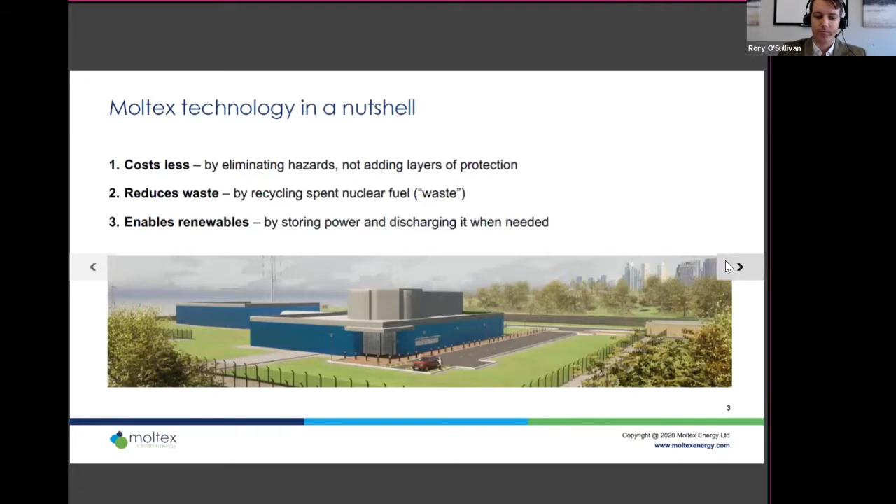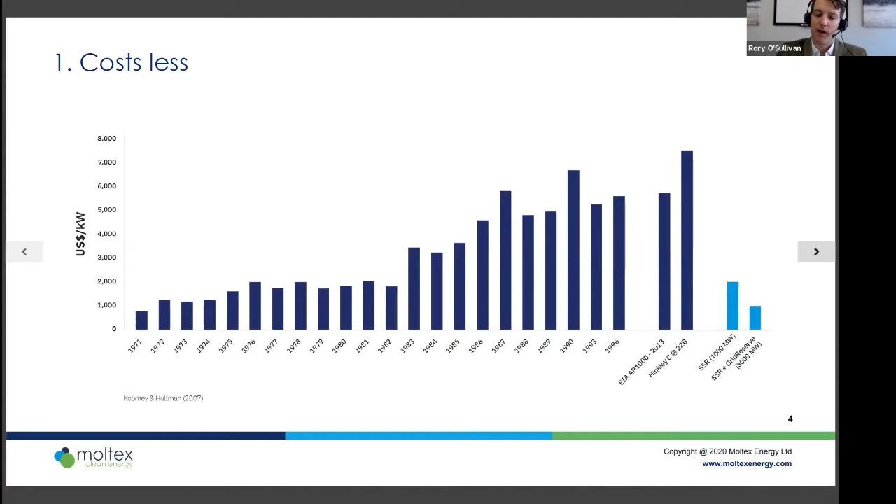That produces clean electricity. They currently are stored in reactor sites all around the country. And at the moment, there's a plan to put them in a deep geological repository somewhere in Ontario in the future. That is a sound plan, it's well established, and it's absolutely viable, it's costed. It's the Nuclear Waste Management Organization dealing with that.

But what we're proposing is a little different. This is what our research is going to evaluate, whether this is possible and feasible economically. We're looking at taking that used fuel that's currently stored at the reactor sites and converting that into fuel for our reactor. We can then produce more clean electricity with our reactor from that waste.

Now, we'll still have some waste from our reactor, so we can't ever get rid of the problem, but the intention is to really reduce the amount of long-lived waste that needs to go into that storage facility, and reduce the complexity and radiotoxicity of it over the long term.

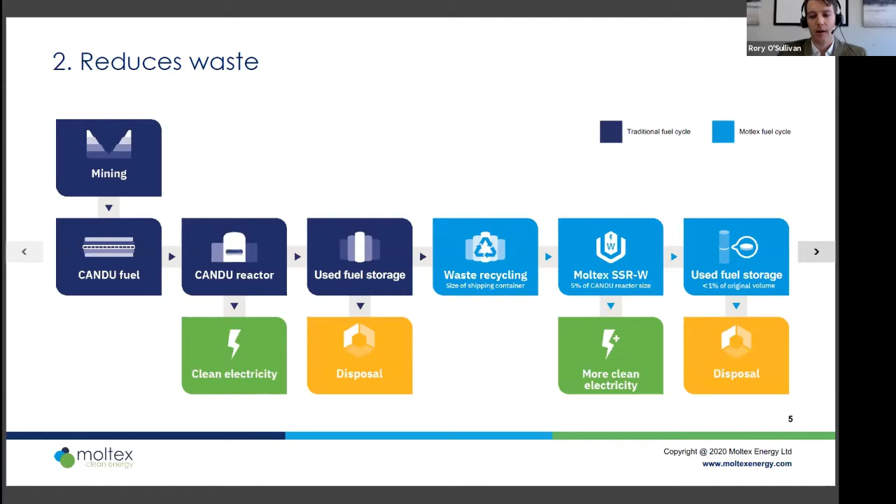Next slide, please. And then the third is our ability to complement renewables. So there's been a lot of progress with renewable energy in the last 10, 20 years. However, the planet has spent about $3 trillion on renewables, and actually we haven't changed our carbon emission percentage. We're still at around 36% non-emitting sources.

What you need for renewables to be successful is energy storage. Electric storage is very expensive. We're looking at combining small modular reactors and energy storage so that we can have more renewables on the grid.

Now, I want to add that we're not talking about the micro reactors for northern communities here. We're talking about big power plants that could run cities. So in New Brunswick, we're looking at a 300 megawatt reactor that could potentially go up to 600 megawatts for shorter periods, so you can really get more value out of the renewables when the sun isn't shining or the wind isn't blowing.

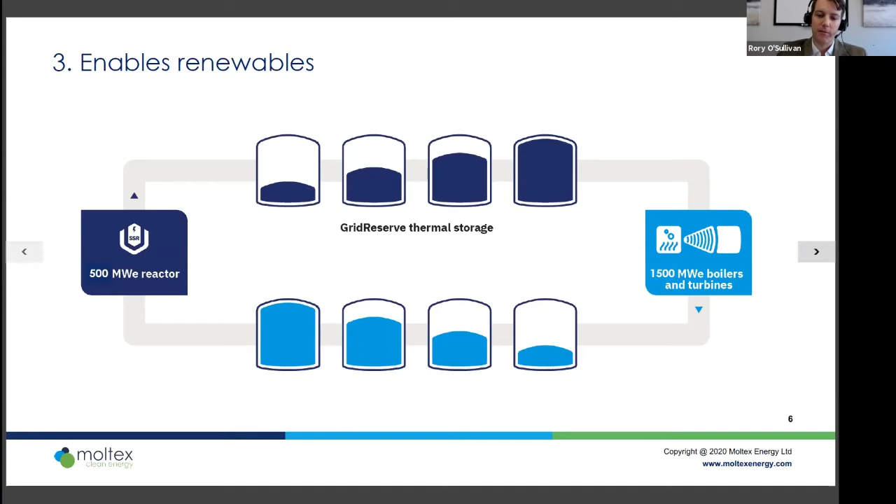So in terms of First Nations engagement, really we're quite committed to early Indigenous engagement in Canada. Some of the reasons for that are we know this technology is really very disruptive. Nuclear power particularly is quite controversial.

So you want to make sure we're really having those discussions as early as possible. But we know the end goal of almost all Canadians is to solve climate change and essentially make the environment in Canada better, and that's with clean energy. So the views are a bit disputed around nuclear. We think it's a clean energy solution. There are some issues with it which we're trying to deal with.

So we want to have these early discussions to be able to understand the issues of First Nations as early as possible. This isn't specifically formal engagement that is required as part of a project. We're way before formal engagement as part of a project. This is really asking the question: do First Nations communities want to actually engage at this early stage? What are the concerns? What does engagement look like?

Where we've got to in New Brunswick, our main partnership is with North Shore Mi'kmaq District Council here. That was a partnership established around May 2020 this year. It's to get meaningful, long-lasting relationships, understand what the communities want out of a relationship, partner with the local Indigenous businesses, and most importantly, create high-value jobs for Indigenous youth to work on training programs so they can actually maximize the benefits of this program in New Brunswick as we move forward.

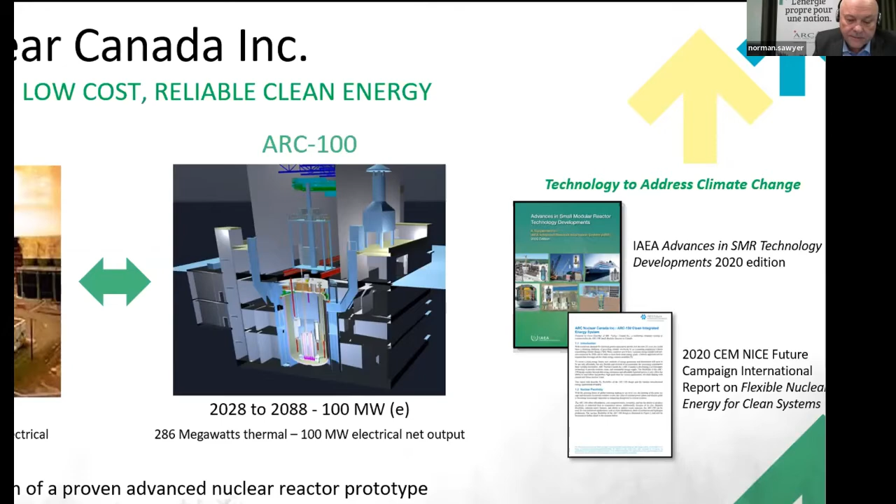There's no real permanent requirement for fueling equipment, because our reactor is fueled once every 20 years. You load the fuel and the reactor will run for 20 years. This really lowers the cost, which is essential for the nuclear industry. The reason for that is we bring to market inherent safety features, which provide natural control of power without human intervention.

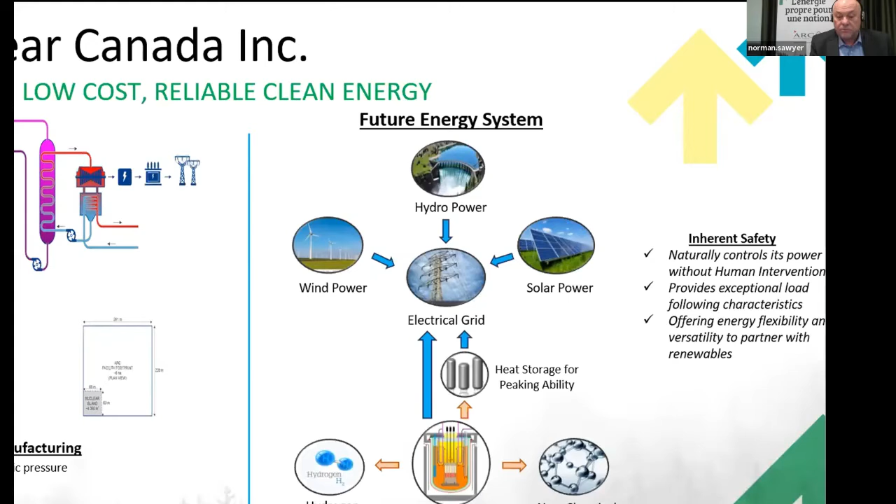Option one is a significant decrease in volume using the current approach. Option two is a direct recycle option, which we call reconstitution, where we can recharge our fuel and use it again for another 20 years. Option three, as we talked about earlier, is going after some of the used fuel that's already in place. Option four is a delayed approach where you can store this reusable energy and use it at a later time. So there's really flexibility we bring to the market for our reactor going forward, which is really critical. Next slide, please.

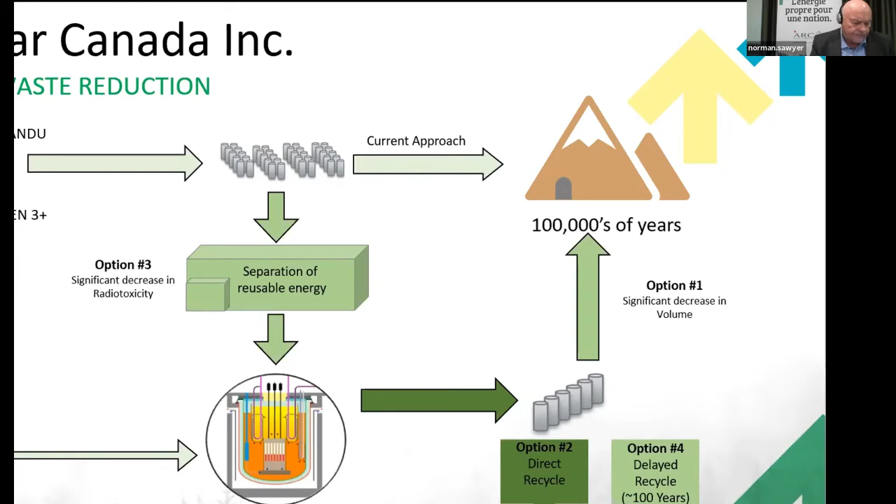As you can see here, when you do this reconstitution, with a 20-year fuel cycle, you get a significant reduction in waste volume and safe storage, plus a significant amount of reusable energy. As Rory was explaining, any used fuel in play here in Canada still contains energy that can be used. It's non-proliferation, and it's an environmentally responsible process because it's a dry process.

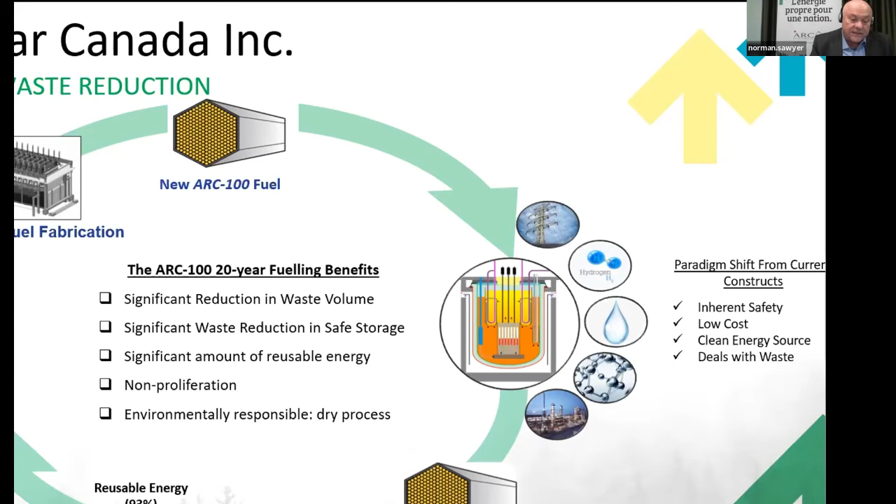So as you reconstitute your fuel, you don't have the waste issues. What that means is you're reusing about 93% of the energy again, which only gives you 7% waste. This diagram compares the different amounts of waste produced for about 90,000 homes for 1 year, roughly the size of Saint John and Fredericton, New Brunswick combined, just the houses, as compared to our technology.

Light water reactors, mostly used in the US, produce somewhere around 2 metric tons of waste, where heavy water reactors produce somewhere in the vicinity of over 16 tons. Our little ARC reactor produces less than the other 2 technologies without doing anything. However, if you reconstitute, you can see it's down to a couple hundred pounds, which really addresses one of the major issues, waste, but also addresses the cost factor and the safety factor. So our technology addresses all 3 main issues we deal with today.

Thank you very much.

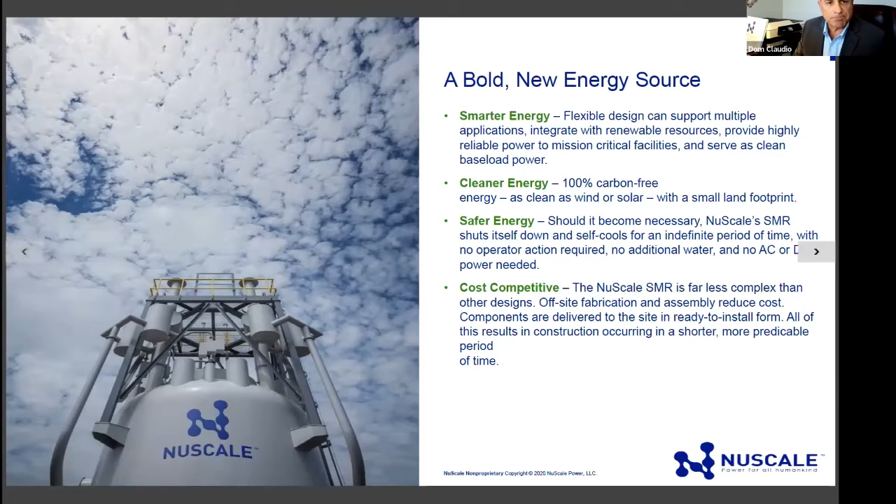So a little bit about the technology itself. At its core is the NuScale power module, that's the picture on the left. It stands about 25 meters in height and is about 5 meters in diameter. It's totally factory built. You see the containment vessel on the outside. Inside is a reactor pressure vessel, and the nuclear core is at the bottom. It's a simple design, taking advantage of natural circulation as the mode of transporting heat to the heat exchangers.

Once this vessel produces steam, and once the steam comes out of the module and goes to the balance of plant, the rest of the plant is very similar to what you would find in a coal-fired plant.

Again, this is factory installed, and each module can produce up to 77 megawatts of electricity with its own power conversion system. So incrementally, in our base case with the US NRC, we're utilizing up to 12 modules in a building for a total of more than 900 megawatts.

However, more recently, as a result of utilizing a power uprate on the module, and focusing more on baseload applications, we're able to extract more thermal energy out of the module. This has allowed for the development of power systems with as little as 6 or 4 modules, somewhere between 450 and 300 megawatts electric.

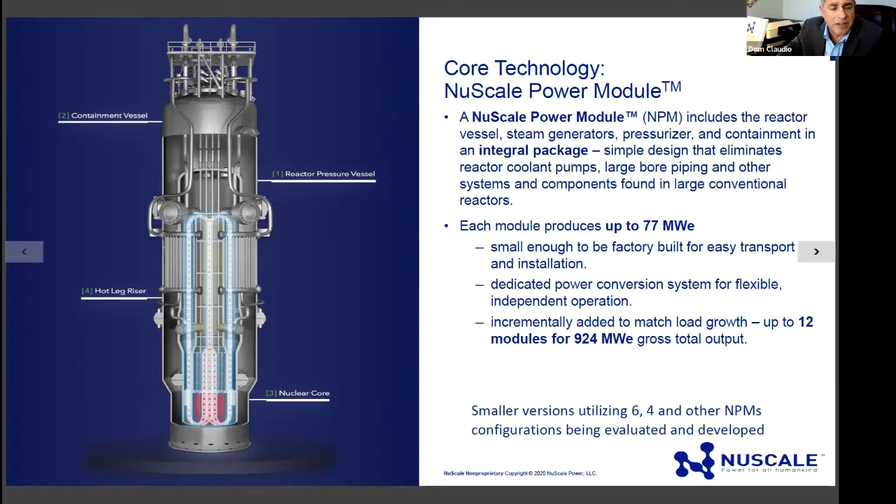So we talked about the module. It goes into the building. In this particular building, our flagship building, houses 12 modules. Smaller configurations are available.

That building sits in the middle of the field, as you see on the bottom right. The total footprint of this particular configuration is about 35 acres or 14 hectares. It can sit very neatly near population centers as well. One of the things we'll talk about in a moment is coal replacements. This is the first and only SMR design to receive US NRC design approval.

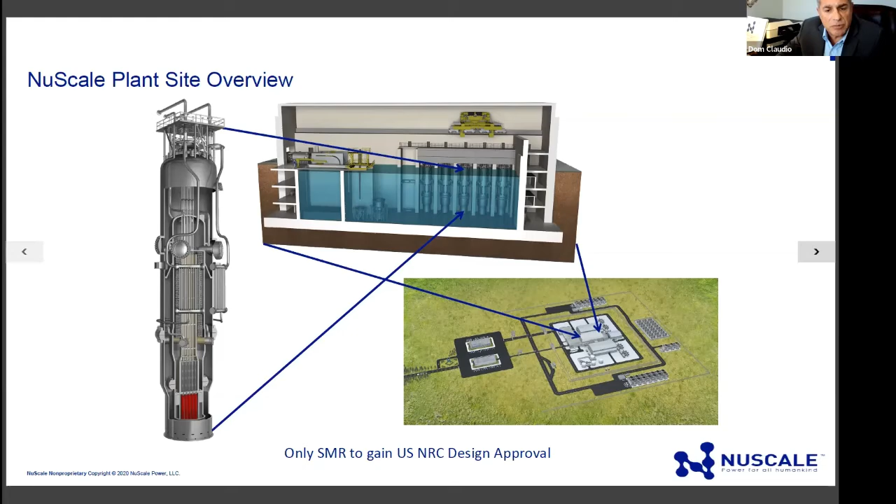One of the things that has been spoken about during this conference, and something I very much appreciate, is the economic impact to the local community and what could be gained from the construction and operation of a NuScale SMR.

Here's a little bit as far as numbers of materials and components required for, at least we'll call it, the 12-bay building, the larger configuration. We're talking about 830,000 square feet of buildings, 200,000 cubic yards of concrete, and the list goes on. What's notable about this list is that it really doesn't travel very well, since you're not going to ship concrete over large distances. So to the extent that a plant of this nature can have a positive impact on the local community, this is the basis of that discussion when we talk about materials, pipe, electrical equipment, and things of that nature.

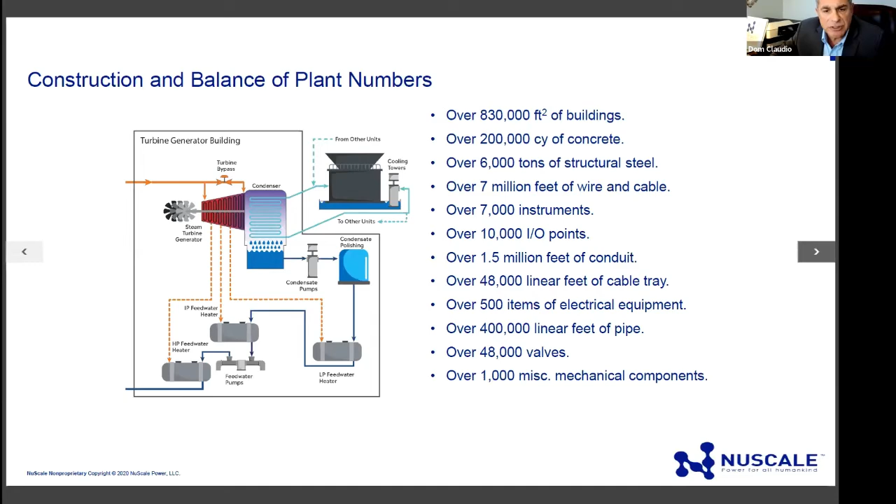From a construction standpoint, again using the model of the 12-bay building, we're looking at about 1,100 jobs just to construct one of the plants. The list is there, I'm not going to read through them, but it's very typical of what you'd find in major construction projects, and certainly utilizing local capabilities is something of interest to all of us.

From an operation standpoint, each plant would require about 300 people full time. As I mentioned earlier, once the steam is produced and goes into the balance of plant through the power conversion system, and that steam is made into electricity, that process looks very similar to what's already in place in a typical coal-fired plant. So a number of the jobs that would support a NuScale SMR would also be applicable from those already utilized at a coal plant.

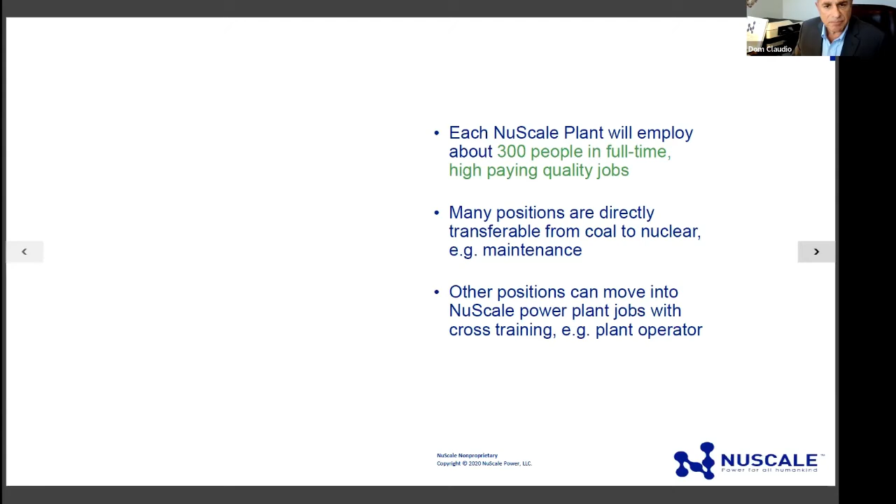We did a little bit of analysis as far as what it would take to retain the coal-powered plant workforce, a side-by-side comparison. The number of nuclear engineers involved is really not that great, it's more the work that's involved in the balance of plant.

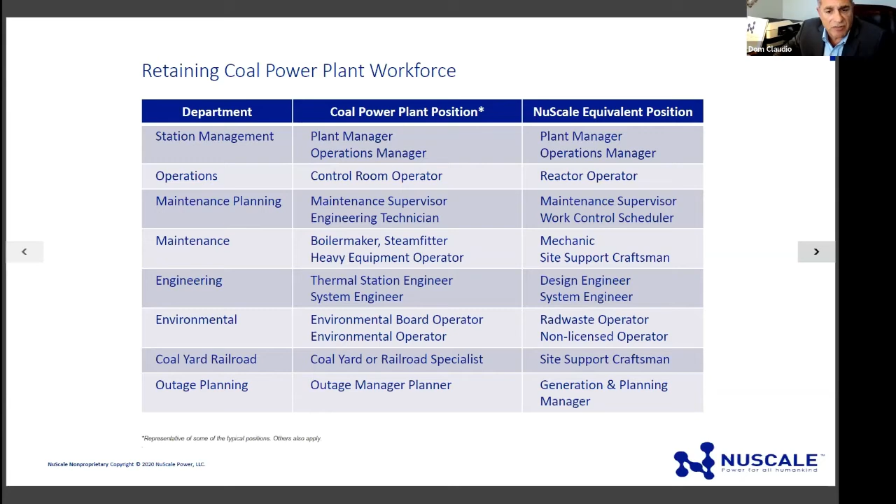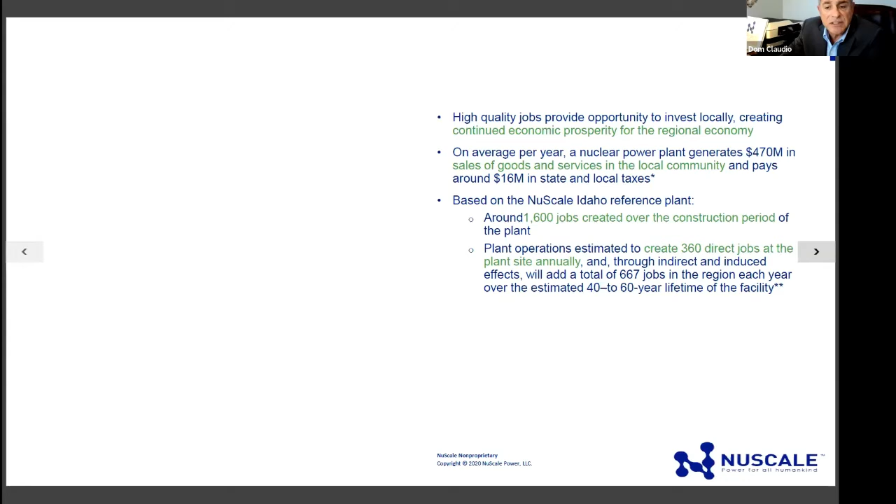Based on the NuScale Idaho reference plant, we discussed the number of construction jobs, and we discussed the number of direct jobs annually to operate the plant. One more slide, please.

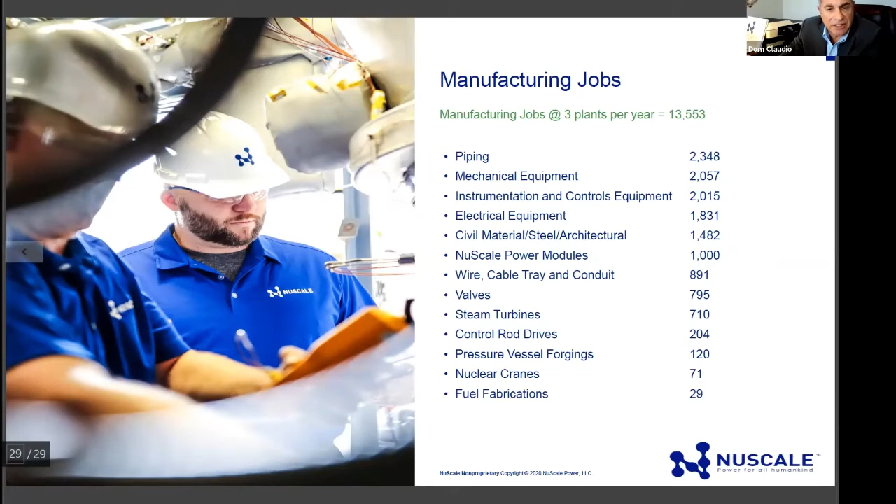I think that's it. So that's in a nutshell, from an economic impact standpoint and a job standpoint. Just wanted to present that and make it available for discussion.